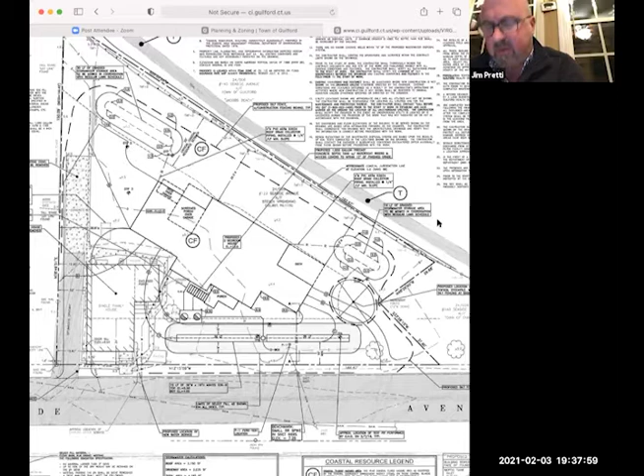Terrific, thank you. Are there any questions from commissioners with respect to this application? Again, the scope of our oversight is the coastal area review. Am I right on that, Erin? Correct. Just want to make sure that the critical coastal resources are protected properly, and they appear to be. Are there any questions from commissioners?

No. Are there any questions from the public with respect to the protection of the coastal area resources? I don't see any. Again, if your camera's not on, I'm not going to be able to see you raise your hand. So if you have a camera and you have a question, if you could raise your hand, that would be terrific. Otherwise, we will assume that there aren't any.

Would anybody like to speak against this application? Would anyone like to speak in favor of it? Terrific. Would someone like to, commissioners, would someone like to make a motion to close?

Motion to close. Thank you. Second. Very good, call a quick roll call vote. Richard Wallace, yes. Frank DeAndrea, yes. Sean Cosgrove, aye. Scott Edmond, yes. Alan Brown, yes. Jamie Stein, yes. And I will also vote to close.

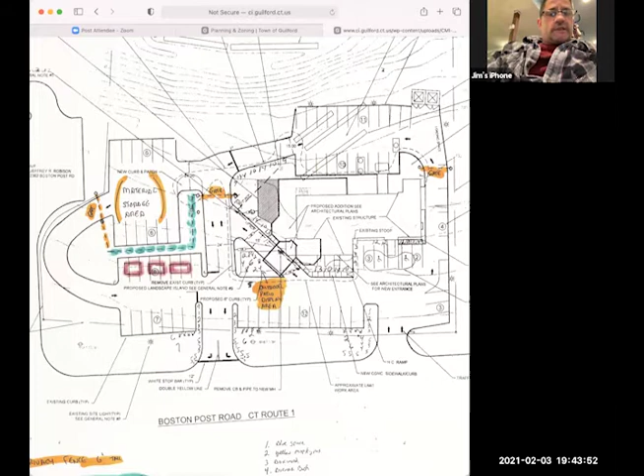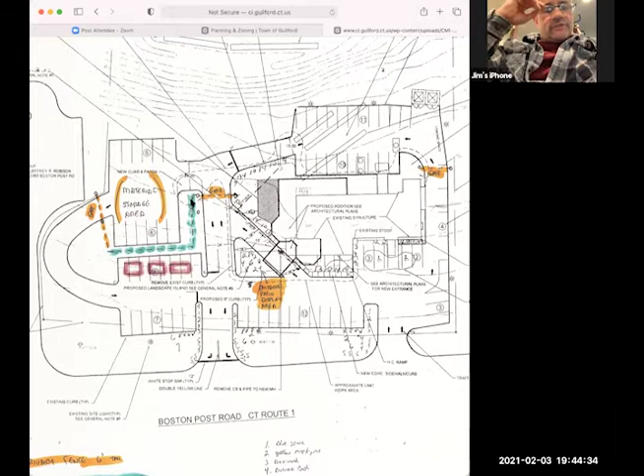So I would like to, in the parking lot area, there's a spot that's already existing in front of the front door that I would like to put an outdoor patio to display some outdoor furniture, maybe, and maybe a fire pit and/or a pergola with an outdoor kitchen. In front of that, I would like to put up decorative fencing along that green line there, PVC fencing, stuff that can be changed or moved. It wouldn't be really permanent. It's for dual purposes: to display some of the PVC fencing that we sell, and also for protection and privacy for the material that's going to be stored behind it.

So this area is a storage area. Correct, yeah, it's proposed. That's where I would like to keep the PVC material. None of it would be visible from the street because of the fencing. All you would see is the PVC fencing. This site slopes down in this general direction. The road is higher, Jim, considerably. These are 3 sheds, like a gazebo, that would not be permanent, that I would be able to move around as necessary, just for display purposes.

And is this your proposed landscaping plan? No, that was existing from when Anthony's restaurant built the banquet facility, I believe. I don't know if it was 20 years ago already or 12 years ago.

So CMI has a current permit to occupy the building in the banquet hall portion for retail sales, and that went in as of right as a tenant fit-out permit. So they have signed permits. They have gone before design review, I think Jim returned a couple times to the committee. I think one of their recommendations, or their only recommendation really, was that this fencing, rather than having alternate colors, would just be one solid fence color, either gray, white, whatever you chose, rather than having it all alternate every 6 feet of different colors. It might help be a little more uniform. I don't believe they had any other comments for you, though. Jim, correct me if I'm wrong.

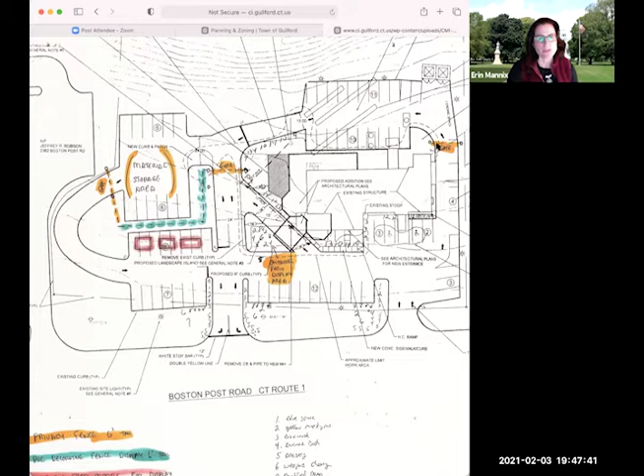These gates were acceptable. The only comment I had from the town engineer with respect to this gate location was that since this is a one-way, would it be better to put the gate up here in case somebody comes down and gets stuck trying to turn around? That's something to consider.

Other than that, I don't believe we have any staff comments on this. Terrific. Jim, this is Scott Edmond.

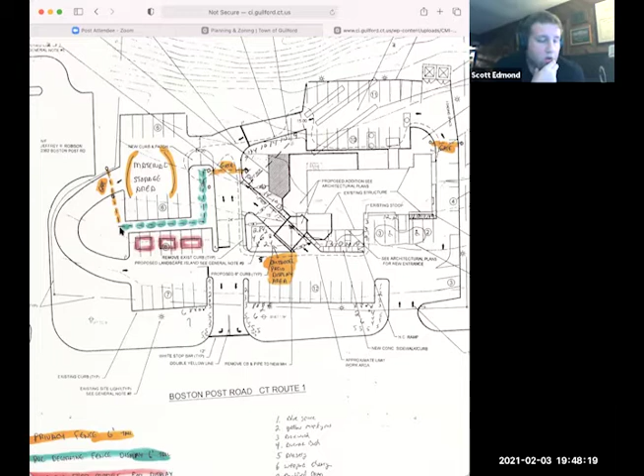I'm looking at the aerial on Google, and it looks like there's a bunch of trees along where your fence line is going in. Are all those trees to remain, or are those trees to go away? No, they've actually been taken down. A lot of them were dead.

The fencing is installed, Scott, and the display - I don't believe the sheds are out, however everything else is on site. Is that correct, Jim, just the fencing? My fence guy went there and put it up more or less for security reasons than anything else. But like I said, it's all removable - everything can be removed.

Any questions or comments from commissioners? Yeah, I have a question. In regard to the outdoor storage, I noticed there's some pizza ovens, some snow blowers - are they staying in that area, or are you looking to move that? The equipment will be brought inside the building every night, so it would just be out there during business hours, but that's the area it's going to stay.

The pizza ovens will just be there for display - I'm not going to actually store any of that stuff on the property. Those are being stored in New Haven. Is that under the overhang in this area here? Yeah, they need to be kept out of the weather, at least when it's cold out.

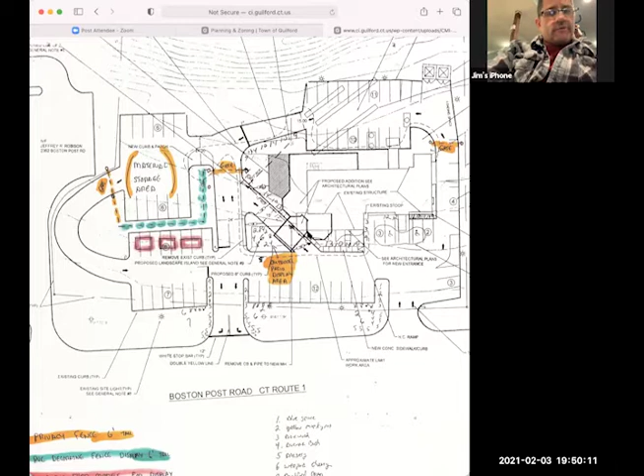As this isn't really accessing any parking, this isn't really being used as a driveway at this point. We were planning on keeping it wide open so people can drive under if it's raining out. There's a sidewalk along the building - a bit of a sidewalk under this portion here.

Are there any other questions from commissioners? Just to clarify, you're not going to be looking to do any bulk storage of mulch with front loaders and dump truck size stuff? No, everything we do is bagged - that's too much of a mess, it tracks out onto the parking, creates dust and a mess. I'm a neat freak, so it's bagged or nothing else.

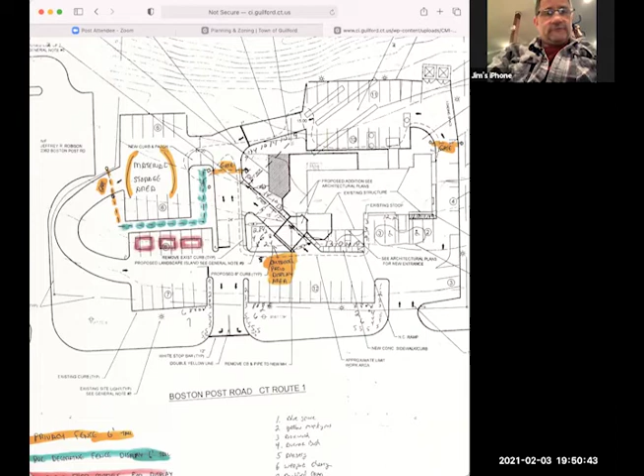Any other questions? Nope. Jim, deliveries get ordered here and then drop shipped from another location - is that essentially correct? Yes. As this is just a site plan, not a public hearing, we don't actually need to seek public comment, is that correct, Erin? Correct, so we'll leave it to the commissioners. Does anyone have any other questions?

Rich has a PZ question. I read the design review minutes of the 13th of January. Jim, are you good to go with their recommendations?

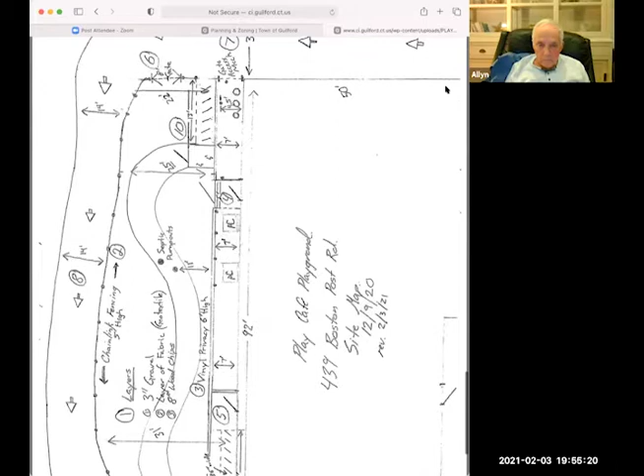We can work with that. Unfortunately, I'm not able to rotate it at this point, but this is the building here. Boston Post Road would be on this end here. This is 95 to the north here. This is the paved parking lot.

Correct. So if you notice at the top of the screen, where those slash marks right by number 10, that's going to be the new ADA 13-foot long ramp. I went 1 foot for every inch, which is the ADA ratio.

Kim mentioned having access from the parking lot, as well as having access directly from the building, which at the bottom of the screen you'll notice is number 5. It's the same exact ramp, 36 inches wide, 13 feet long, with a rise of 13 inches, so it's the 1:12 ratio according to ADA.

Also, if you'll notice right where that 5 is, it's going to be a 5x5 area. That's required, actually it's going to be more. A 5x5 foot area, 60-inch diameter, is what's required for an ADA-compliant landing zone, whether at the start of the ramp or at the finale, which you'll notice at the bottom of the screen—that would be the landing into the playground. Same goes for the one up top, which is the parking lot access.

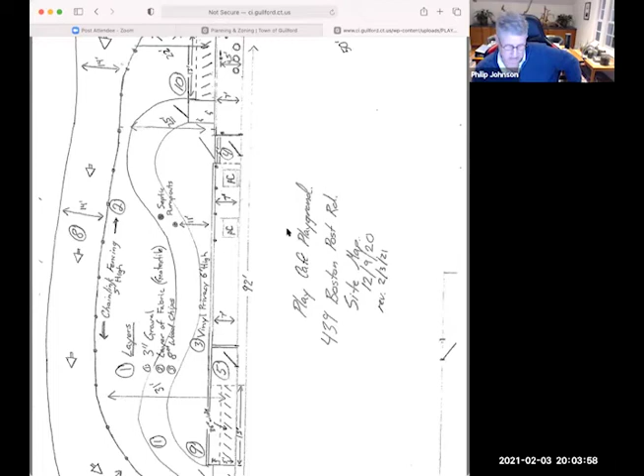So what I'm hearing is, personally, I'd like to have comments from town staff, which we don't have. Garrett, are you willing to grant the commission an extension, or would you like us to try and act on this evening?

I'd like to go back to Scott's question and kind of get an answer on that, because that was actually one of my questions. If this is built with these specs in place, if it's not built with these specs, then it would be shut down or delayed or whatever the case may be, like any other plans out there, professionally engineered or not.

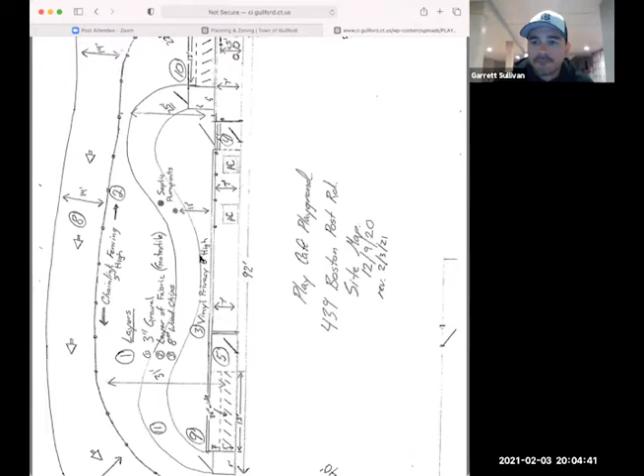I think the engineering question is separate, because we don't know for sure whether these dimensions all meet applicable codes and regulations. I'm just trying to get an idea of what the process would be from a town point of view. Garrett, I wanted to ask one more question about that outside line.

Is that meant for, like, is that the edge of blacktop? That's an existing curb. That's the existing curb for the blacktop that's out there.

So to follow up on your question, Garrett, reiterating what Scott had asked, I find this a challenging plan to confirm that it was built to specs. One, there is no scale on this. We have a dimension here that does not necessarily depict a measurement from the wall to a fence line. Then you have one an unknown number of feet down. This is not a straight line. I have no way of knowing what a dimension from here to the building is.

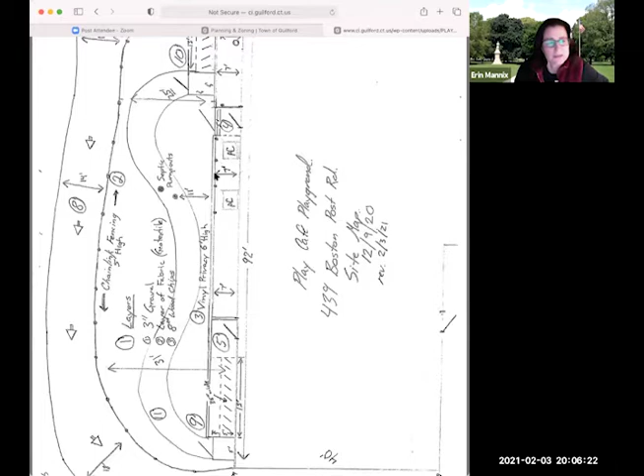To ensure there is an adequate distance here, if you're expecting staff upon installation to go out and measure each fence post to the curb to confirm that, I think that's... that was part of my question. Yeah, you're taking some risk, Garrett.

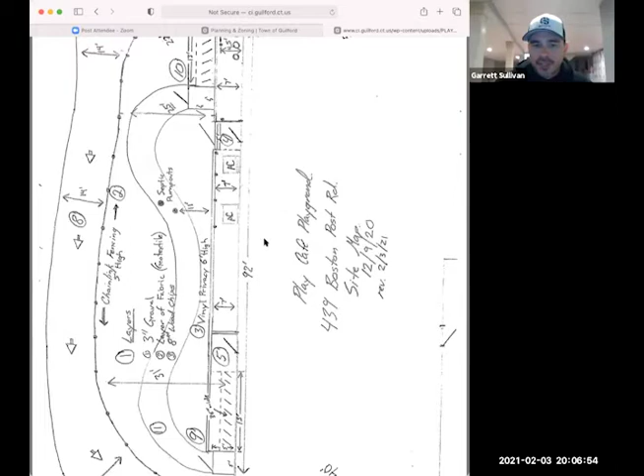Understood. With the 31 foot line there, that is building to fence line, and the one above it would be fence line to fence line. I mean, in regards to that, if I need to extend the arrow.

Can I just say, this is a rather crude drawing for a children's playground for us to approve. It is. I think that's the point Phil made, and the concern we expressed at the last meeting.

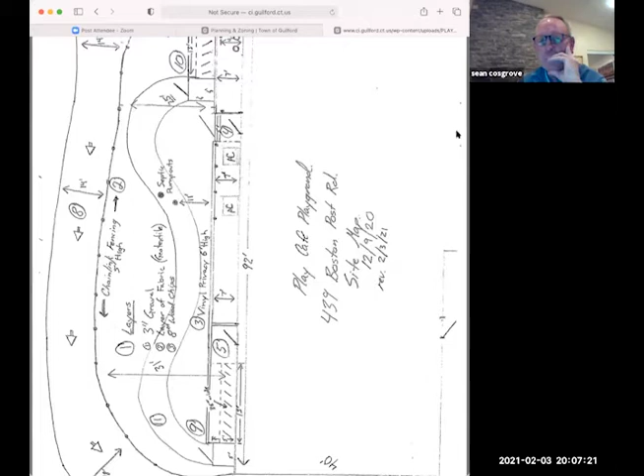So if there aren't any other questions, I'll put the question back to Garrett. Do you want to grant us an extension for a period of time in order to obtain comments from town staff and potentially consider a professional plan, or would you like us to act upon this?

Well, I think we all know where this is going at this point, since there hasn't been one positive comment about it at every meeting I've had. Being thrown under the bus doesn't help either. Janice presented me with a memo at 4:30 the evening of a meeting, and everyone was able to view that, but mine today at noon, they were not able to view, unfortunately.

So probably extending it would be a good idea, I would imagine. Thank you, I appreciate that. How many days extension are you granting the commission, Garrett? 20. Where does that put that? That gives us only one more meeting. Could we go for 30? Sure, that would be great.

Can I ask a question? Please. So are we doing this just for staff? Is there any thought, Garrett, of actually getting a site plan? I know you expressed there's some financial constraints with it. Are we going to be looking at the same map or the same drawing? In all honesty, I don't know.

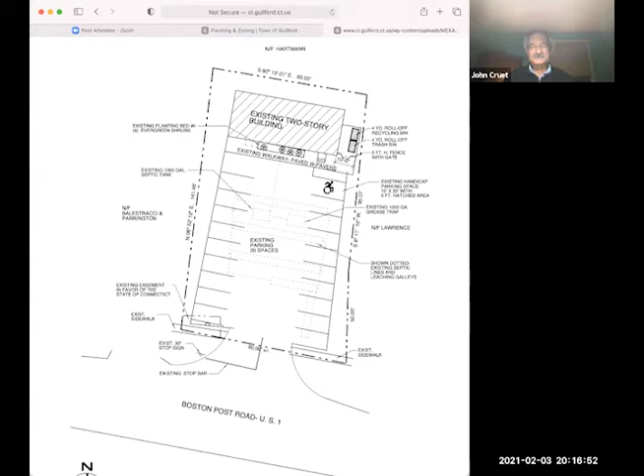The main change in the site plan is to screen 2 roll-off bins, one a recycling bin and the other a trash bin, from street view by constructing a 5-foot-high fence with a gate, which is a 6-foot-wide double-acting swing gate that would allow access to these 2 trash bins.

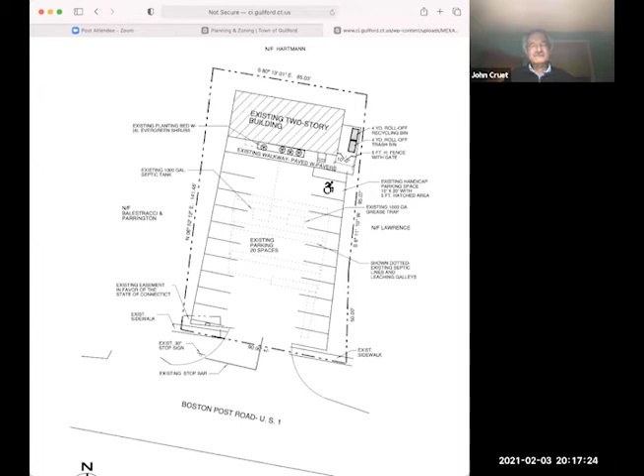The proposal is to change the existing first floor, which currently is a cycling studio, into a restaurant. Basically, it's a basic restaurant.

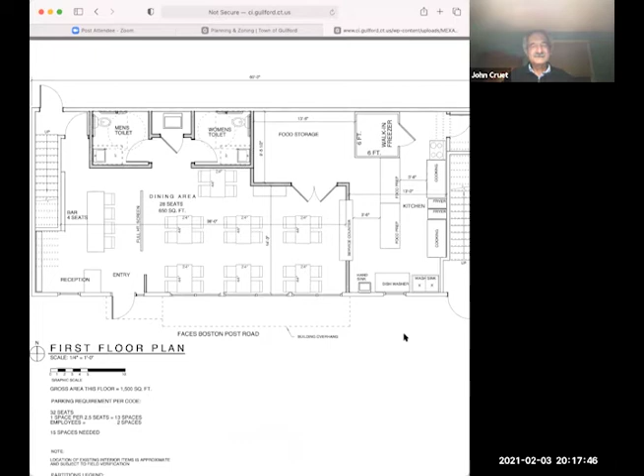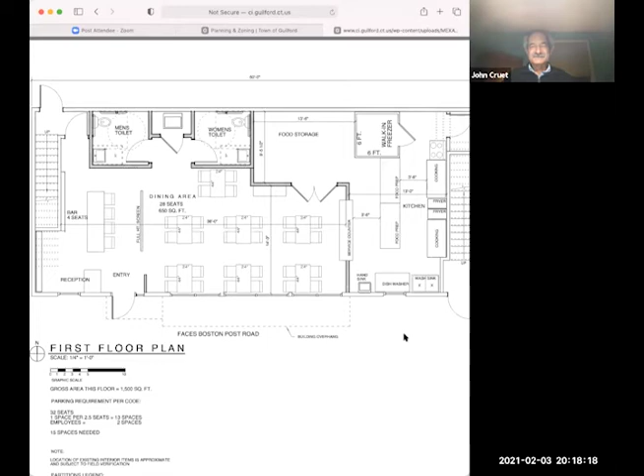We propose a couple of toilets, a full service kitchen, and there's a bar function with seating for 32 seats - 28 in the dining area and 4 in the bar area. The kitchen consists of equipment which Cy currently has in his current restaurant and will be relocated, and we're also going to have a walk-in freezer and food storage facilities.

The second floor plan is currently office. We're going to have a private dwelling unit up there, which Cy is going to use for his own personal purposes, and a private office, which could either be his or something he might lease out to others.

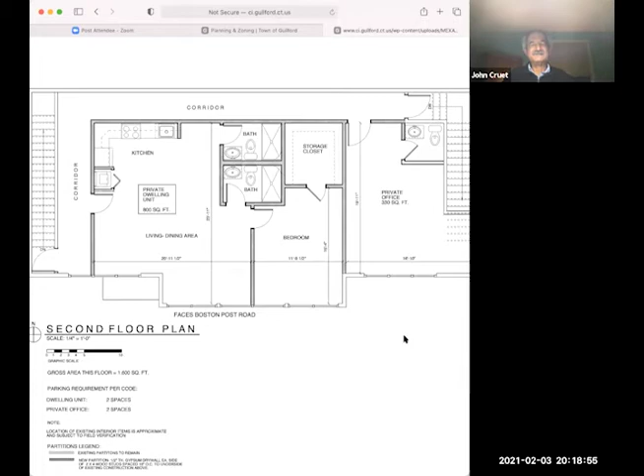As far as accessibility, the first floor restaurant is accessible to and usable by disabled persons according to ANSI A117.1. So we've covered that base.

We did have a few comments from staff thus far. One having to do with the fire marshal's comment that he was going to look into the need for an automatic fire protection system. I had sent out a recent email to planning and zoning with a response to that, citing a section of the building code. It appears, in my professional opinion, that we do not meet the 3 criteria that would make us provide an automatic fire protection system. However, an automatic fire protection system by Ansul is required and will be provided over the entire cooking area - the stoves, the fryers, etc. - because code does require that.

Other than that, that's pretty much it for my presentation. I'd be more than happy to answer any questions that zoning staff might have.

We actually have a memo from Sonia Marino. Jamie, you want to take that one? Oh, Jamie's muted. Sorry, my son is going to bed and being loud.